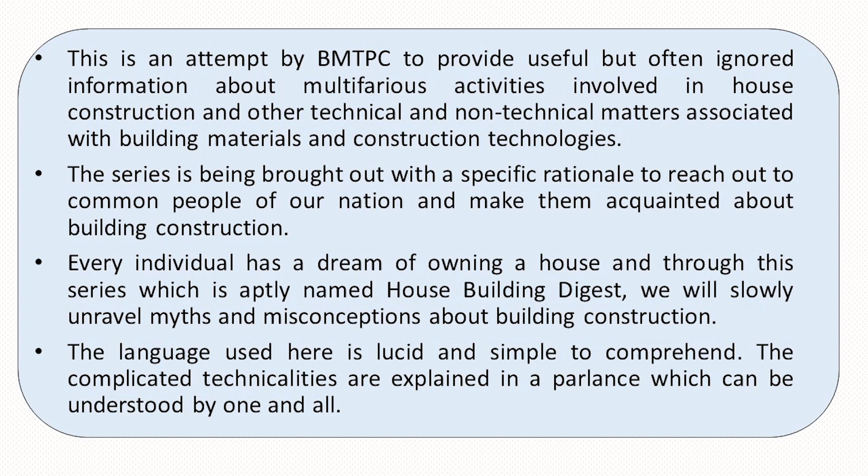Through this digest series, BMTPC is making an attempt to provide useful information about various essential activities involved in house construction, including technical and non-technical matters associated with building materials and construction technologies. Every individual has a dream of owning a house, and through this digest series, we will slowly unravel myths and misconceptions about building construction.

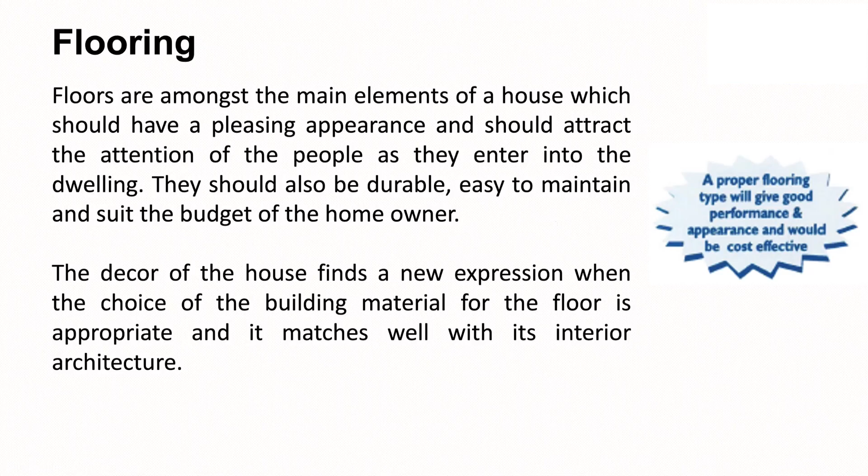The language used here is simple so that it is understood by one and all. Having discussed main building elements including doors and windows, now let us move to floors. Flooring, being a main element of the house, must have pleasing appearance and should attract the attention of people as they enter your house. Also remember, flooring should be durable, easy to maintain, and suit the budget of the owner. Normally, choosing a floor of appropriate material and appearance matching the interior architecture of the house gives aesthetic and new expression to the house. In this digest, we will discuss different types of flooring to choose from.

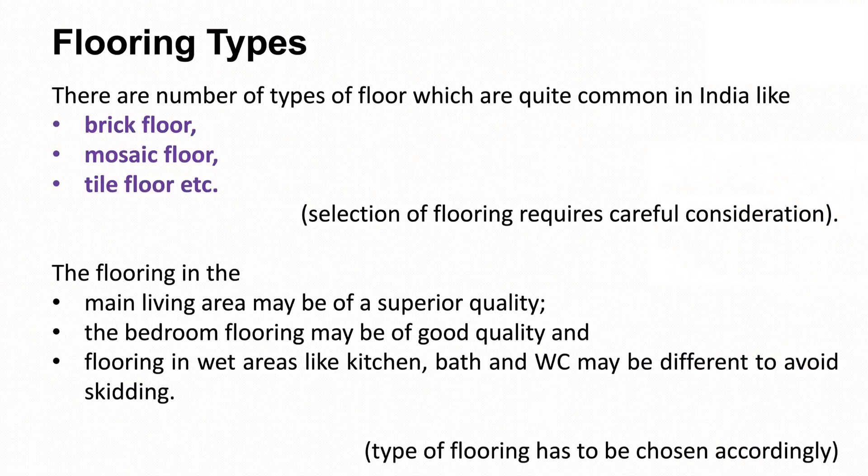There are different types of flooring: brick floors, mosaic floors, tile floors, wooden floors, cement floors. There are umpteen number of flooring options available nowadays. Therefore, the selection requires careful consideration, and different types of flooring are to be provided based on the use the floor is being put to. For example, living area may have superior quality floor, bedroom may be of good quality, and wet areas may have floors avoiding skidding, and therefore the type of flooring has to be chosen accordingly.

Similarly, let's talk about climatic conditions. The flooring to be chosen depends upon the climatic conditions. For example, in extreme hot or cold conditions, marble or stone flooring needs to be avoided as it may make walking difficult. Similarly, slippery floors are to be avoided in exterior locations such as balcony, terrace, or wet areas. It is pertinent to mention here that flooring for non-residential areas like institution buildings, airports, factories are provided in different manners as they are subjected to heavy use.

Please remember, flooring to be adopted for the house therefore depends not only on use of building and climatic condition, but also on local availability of material and flooring. Also, overall cost needs to be kept in mind while choosing flooring.

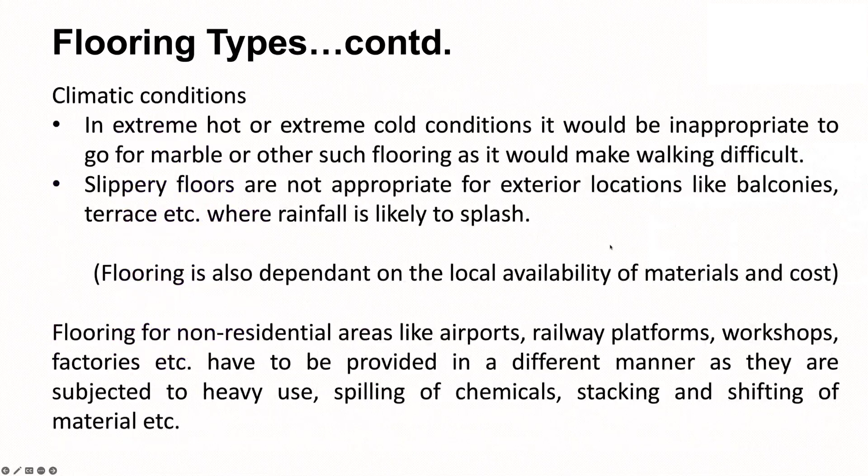Now let's discuss different types of flooring. As you can see here, the most common types of flooring used in India include mud flooring, brick flooring, stone flooring, concrete flooring, terrazzo flooring or mosaic flooring, marble flooring, tile flooring, wooden flooring, bamboo flooring, linoleum flooring. All these kinds of floorings have different performance characteristics and will be explained to you in subsequent slides. It is always advisable to have a look at the flooring being used in the area and also discuss with your architect before choosing the flooring for your house.

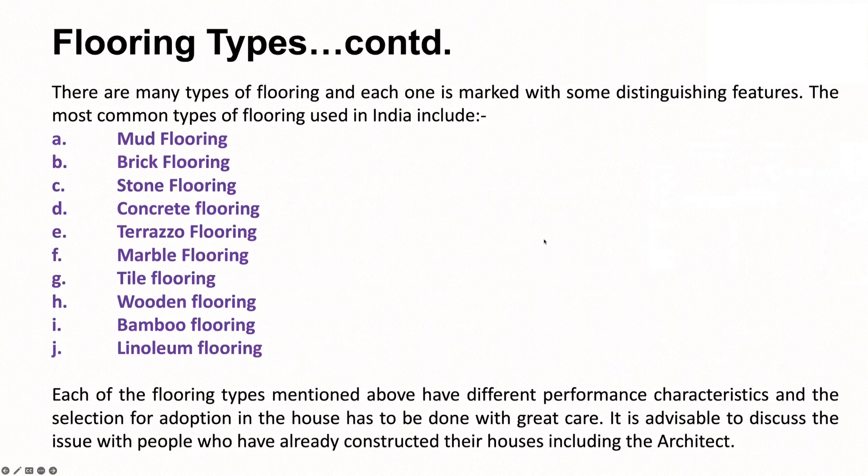Let's see mud flooring. Mud flooring is quite popular in village housing as it is readily available and its construction is very simple. First, good quality and clean mud is selected and mixed with chopped straws or bhusa along with water to get a consistent paste. This paste is applied on the already prepared bed of floor and rammed properly to get an even and level surface of about 6 inches.

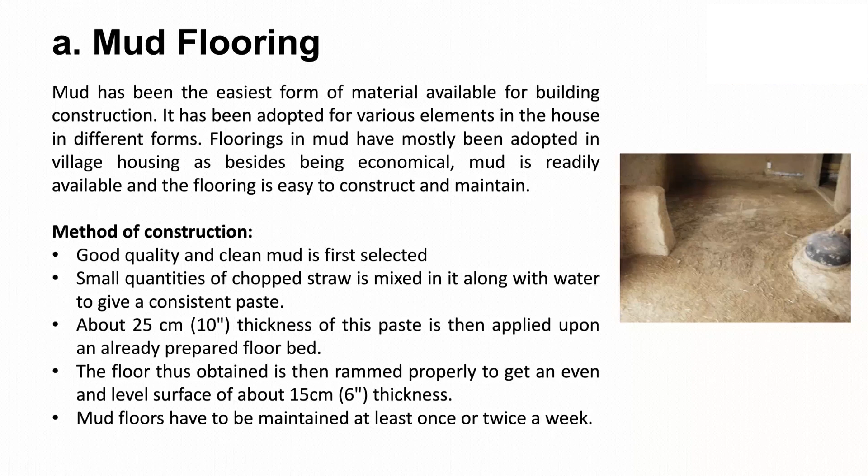Your mud floor is now ready. These kinds of floors need to be maintained once or twice a week.

Now let's see brick flooring. Brick flooring is of two types: bricks on edge and bricks laid flat. Bricks have been the mainstay of building construction in India since the time of Mohenjo-daro and Harappa. It has been successfully used for foundations, walls, roofs, etc. Brick flooring is advantageous in areas where bricks are available locally.

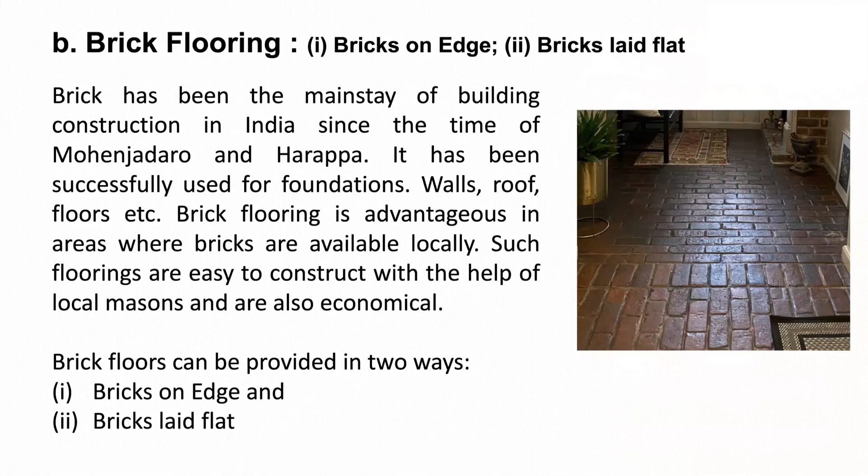Such floorings are easy to construct with the help of local masons and are also economical. Brick floors can be provided in two ways: bricks on edge and bricks laid flat. Bricks on edge flooring is most suited for ground floor in a house for interior locations. They can usually be provided as exposed flooring, or having a plaster coat on the same. Plastered floors in bricks are better suited for exterior locations like verandas, courtyards, etc., or wet locations like kitchen, WC, etc.

To construct this type of flooring, the filled up earth under the flooring is compacted well, followed by laying about 10 to 15 centimeters, or 4 to 6 inches, of cement concrete in proper slope for draining out water. Bricks required for flooring are to be adequately soaked in water for at least 6 hours before use so as to keep them wet. Then a 12 mm mortar is laid on the already prepared concrete base.

On this mortar bed, bricks are laid on edge and jointed with mortar. Bricks can be laid in a pattern if the flooring is to remain exposed. In such a case, the joints should be rendered flush and finished to get an even surface. The surface so obtained should be kept moist for a period of at least 7 days.

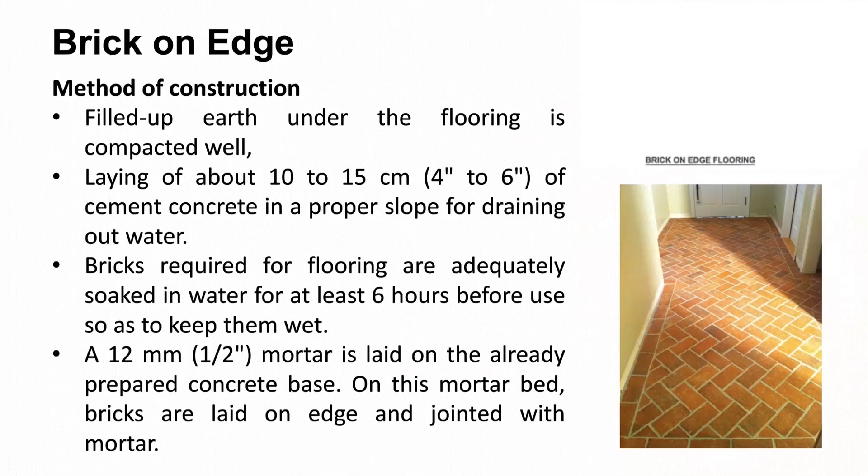If the brick on edge flooring is to be plastered, the joints in brickwork should be raked properly by about 15 mm during the process of laying of floor, and plastering should be done over it. Plastered brick floors perform better than non-plastered surfaces, although plastering adds to the cost of providing the flooring.

Now let's discuss bricks laid flat. This kind of flooring is prepared in a similar manner to brick on edge flooring. In this case, the brick floor thickness is kept at 7.5 centimeter or 3 inches, as against 11.5 centimeter or 4.5 inch in case of brick on edge flooring. The number of bricks used is less than in brick on edge flooring, as also the quantity of mortar. Such flooring is most suited for upper floors, as weight coming on the walls and foundation is comparatively less on upper floors.

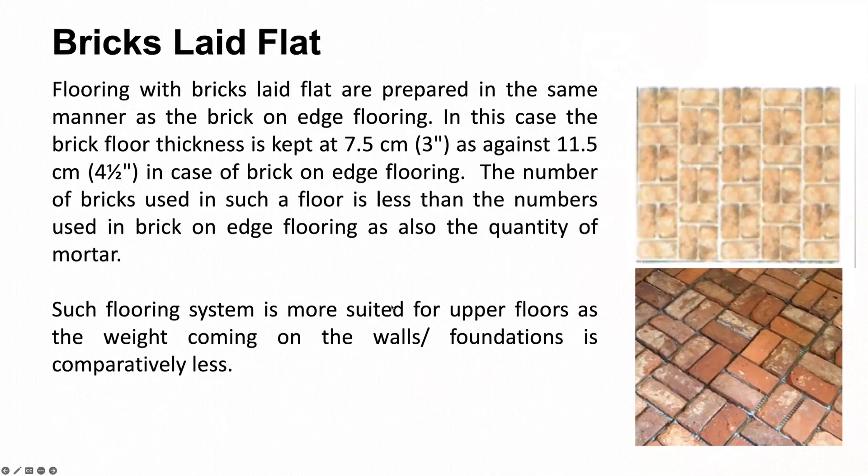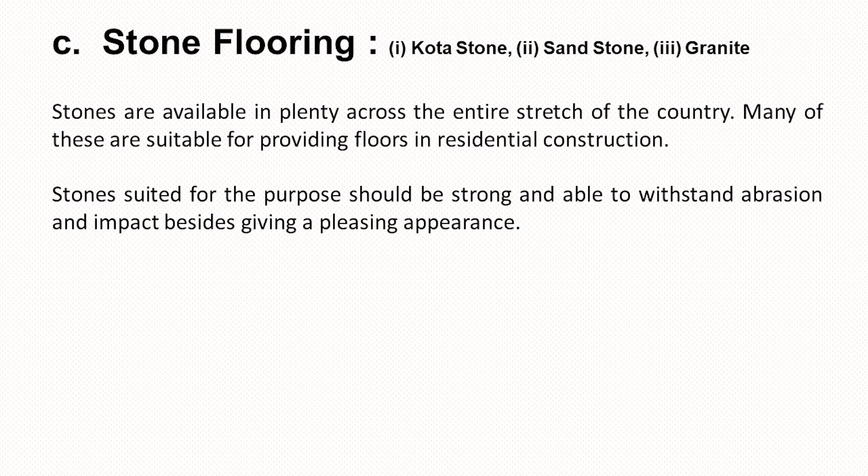Let's now see stone flooring. Stones are available in plenty across the entire stretch of the country. Many of these are suitable for providing floors in residential construction, such as Kota stone, sandstone, and granite. Stones suited for the purpose should be strong and able to withstand abrasion and impact, besides giving a pleasing appearance. Let's discuss them one by one.

Kota stone is a quarried stone which is cut into different sizes for providing flooring in residential areas, including on steps, risers and landings. The stone used should be of good quality, free from cracks and other such flaws. The thickness may vary from 2 centimeter to 4 centimeter depending upon the location it is being used. The top surface of the Kota stone is polished before being brought to the site.

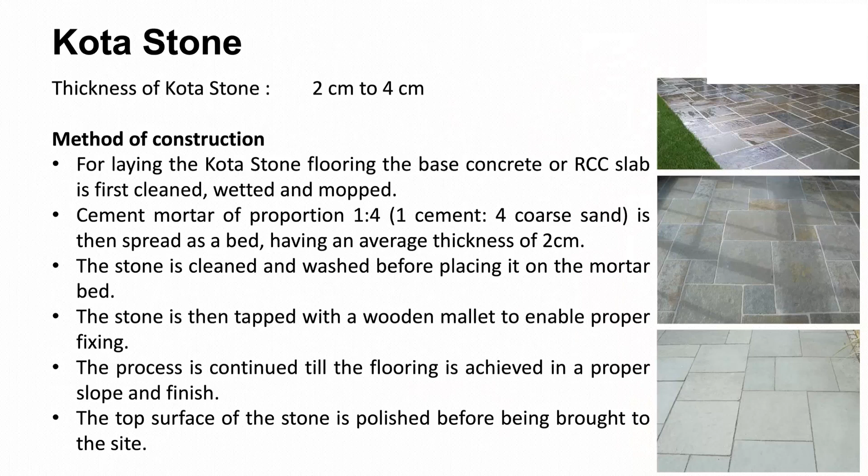For laying the Kota stone flooring, the following method is adopted. First, the base concrete or RCC slab is cleaned, wetted and mopped. Then cement mortar of proportion 1:4, that is 1 cement to 4 coarse sand, is spread as a bed having an average thickness of 2 centimeter. The stone is then cleaned, washed, and placed on the mortar bed, then tapped with a wooden mallet to enable proper fixing. The process is continued till the flooring is achieved in a proper slope and finish.

Now let's discuss sandstone. Sandstone has different physical and chemical properties compared with Kota stone. It is usually available in white or red color. Each stone is cut into the required size and shape for application as flooring. The finished thickness before application is usually 4 centimeter or 40 mm.

As in case of Kota stone flooring, the base concrete or RCC slab is cleaned, wetted and mopped. In this case, a bedding mortar of proportion 1:5, where 1 is cement and 5 is coarse sand, is first laid. The sandstone is then laid over it to the required level and slope.

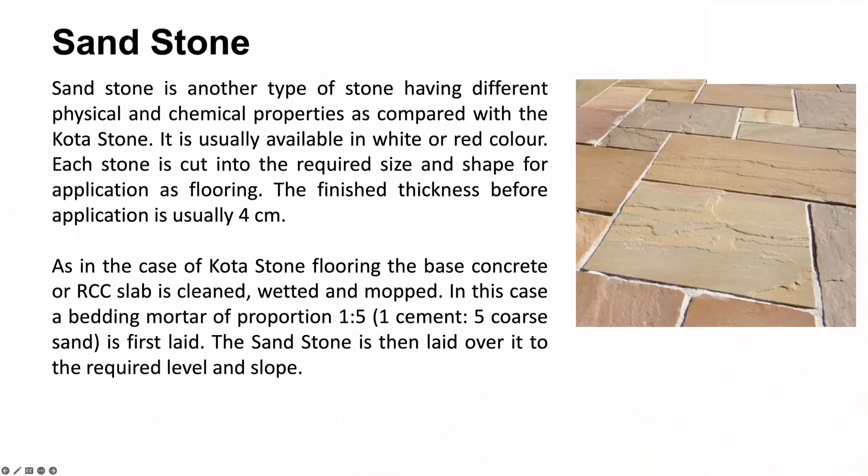Let's now move to another kind of stone flooring, that is granite floor. Granite is a natural stone immensely used in house construction, including for floors. It is available in various forms like tiles and blocks. Its fabrication and polishing is a well-defined process which needs to be executed only by well-trained and experienced hands. The natural shine of granite may last forever if treated with care. Flooring with granite is amongst the costliest, although it gives an elegant and pleasing look. The laying procedure for granite stone flooring is similar to that of Kota stone or sandstone.

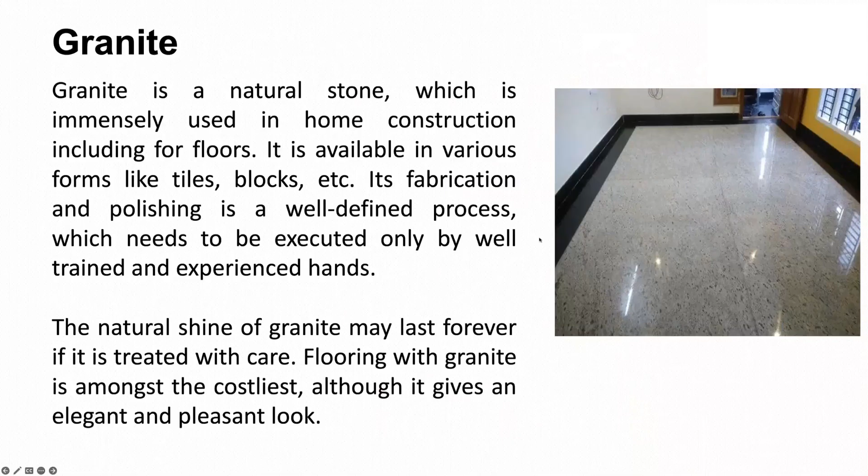Next is cement concrete flooring, also known as IPS flooring. This is one of the most common types of flooring provided in houses. This type of flooring is quite durable and easy to construct and maintain, besides being economical compared to tile, marble or other such types of flooring. In most government houses, this kind of flooring used to be preferred.

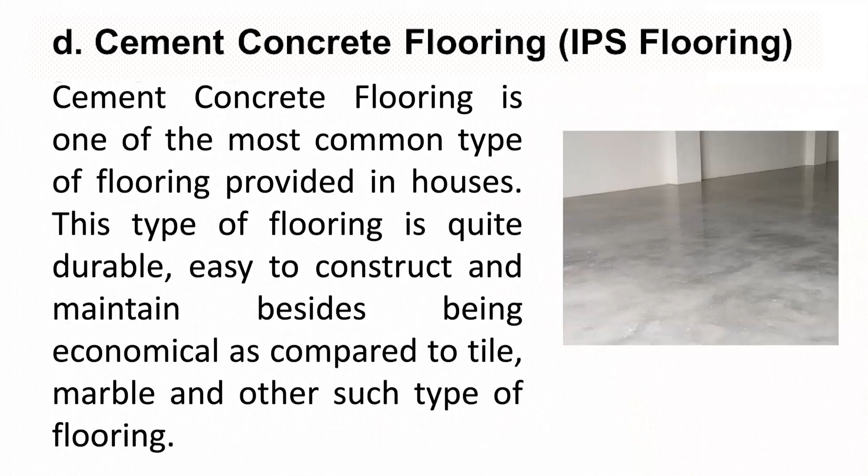When such flooring is to be used for the ground floor, the following procedure is adopted. First, the earth in the plinth is properly consolidated. Then a layer of clean coarse sand about 10 to 15 centimeter thick is uniformly spread over the earth filling. During its consolidation, care has to be taken that a proper slope as required for the floor is provided. The base concrete, either in cement or lime, should then be laid about 7.5 to 10 centimeter thick over the coarse sand in the required slope, and tamped properly.

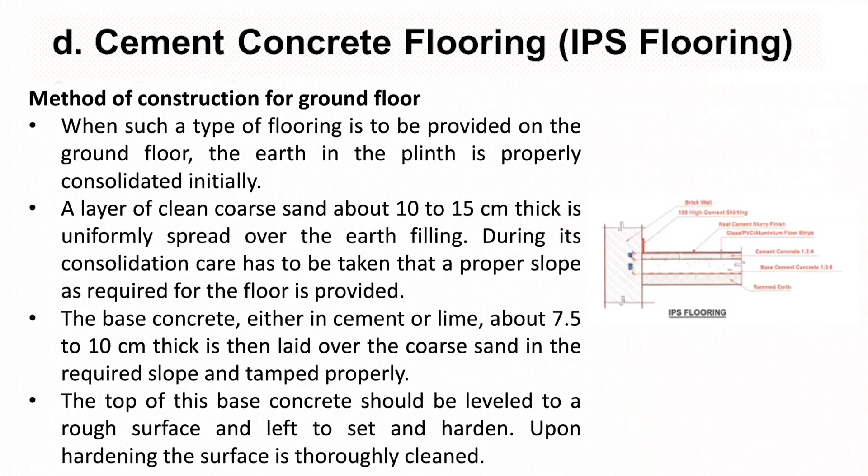The top of this base concrete should be leveled to a rough surface and left to set and harden. Upon hardening, the surface is properly cleaned. The top of the floor is then divided into panels, rectangular or square in shape, using glass or other strips. The area of each panel should preferably be less than 2 square meters.

Once the paneling has been done, the top of the base concrete is made damp and cement slurry is applied on it. This slurry creates a proper bond between the base concrete and the topping. Normally, cement concrete of proportion 1:2:4, where 1 is cement, 2 is sand and 4 is coarse aggregate, of required thickness, say about 4 centimeter, is provided as the topping concrete.

The top surface is thoroughly tamped and floated with wooden floats to obtain a smooth surface. The surface so obtained is cured for about 10 days before putting it to use.

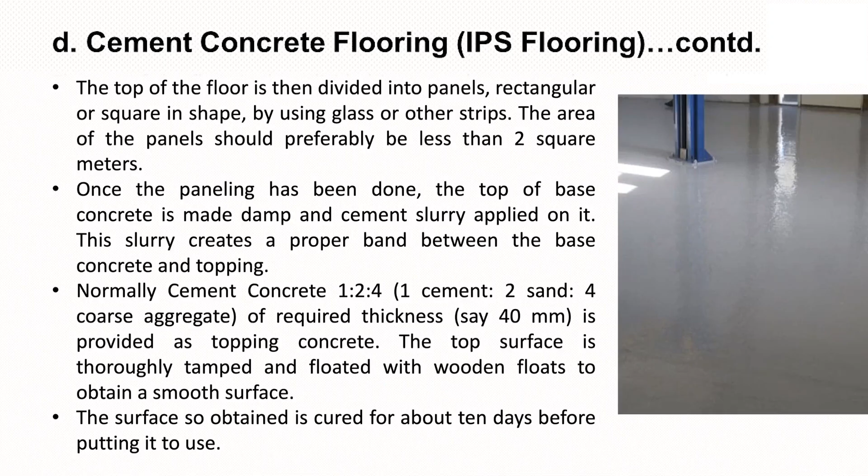Now let's see cement concrete flooring for upper floors. When this kind of flooring is to be provided on upper floors, the top concrete is laid directly over the RCC slab. At times, a cushioning layer of lime mortar is also applied over the RCC slab before laying the top concrete.

Cement concrete flooring can be finished with a plastering layer of 10 mm thick red oxide of iron. This would give a red color look to the surface. Different designs can be made by making panels in the floor and filling them with plasters of required color.

Lately, there has been a practice of polishing cement concrete floors to give a shining finish. Polished concrete is a high gloss finish attained by using special floor polishers to grind down surfaces to the desired degree of shine and smoothness. The resulting surface requires less maintenance and can be stained to replicate the look of polished stone. Polishing of concrete floors adds to its cost.

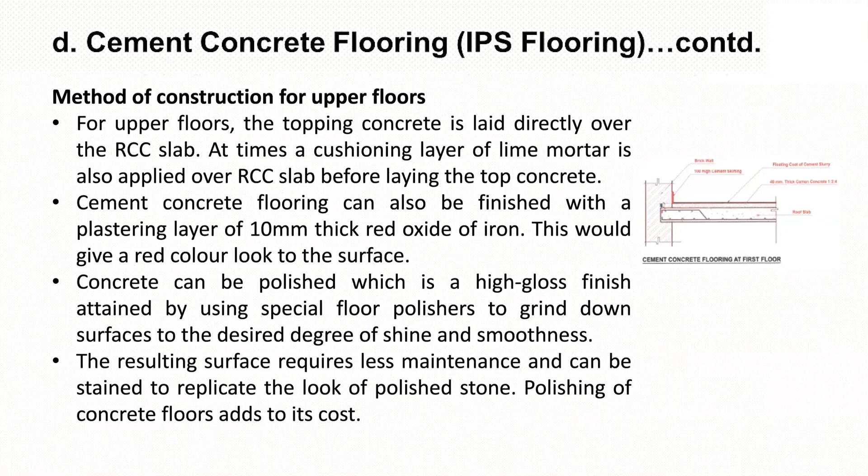Now let's move to another category, which is mosaic flooring or terrazzo flooring. This is another type of flooring commonly used in India. As this type of flooring gives a pleasing look, it has been extensively used for living rooms, bedrooms, etc.

This type of flooring is provided in the same manner as cement concrete flooring, except that the top layer consists of terrazzo, which is a mixture of marble chips and white or colored cement in the ratio of 3:1. For a 40 thick terrazzo floor, an upper layer of concrete 34 thick is first provided over the base concrete, finished with a topping of terrazzo 6 thick.

Paneling, etc. can also be done as in the case of cement concrete flooring. The surface obtained after application of terrazzo floor is damped and rolled and left to dry for about a day or so. After this, the surface is cured for about 2 to 3 days with standing water.

The grinding of the surface is then done 2 to 3 times, either by hand or by grinding machine using carborundum stones. In case the chips become loose or come out of the surface, repairing has to be done with cement grout. The floor is finally polished either manually or with the help of machines.

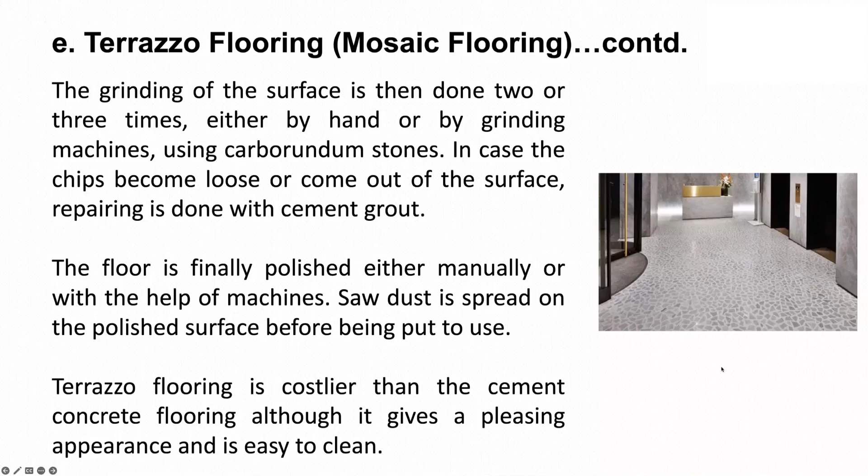Let's see now marble flooring. Marble flooring has traditionally been provided in religious places, palaces, havelis, etc., as it enhances the look of the structure. Lately, such flooring has been used extensively in residential buildings also.

The method of construction is as follows. Marble flooring is laid on the prepared subgrade or RCC slab. Upon cleaning the subgrade, a 20 thick mortar in cement and coarse sand in the ratio of 1:4 is first applied. Each marble slab is then placed and pressed on the bed mortar. The marble slab is then lifted and mortar filled up in the hollow portions.

Upon slight hardening of the bed mortar, cement slurry is applied on the surface. The marble slab is then laid back and cement slurry is applied on the sides of the marble slab. The process is continued to obtain the floor of required finish and slope. The surface so obtained is cured for a period of about 10 days, and if need be, polishing can be carried out on the top surface.

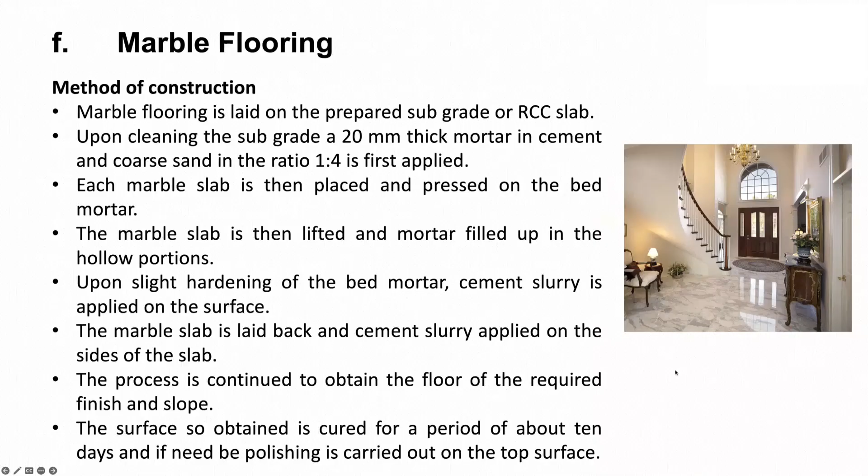Now let's see tile flooring. Flooring tiles in India have been there over the years, and they have gained popularity over cement and concrete floors. Flooring tiles are available in different patterns, designs, and utility options. Usually they are costlier than cement concrete flooring, and their cost depends upon the type of tiles being used.

Various types of flooring tiles in India include terrazzo tiles, checkered tiles, glazed tiles, vitrified tiles, PVC tiles, etc. A wide variety of tiles are currently available in the market, and homeowners have to make a choice depending upon the finishing to be provided in the house, its location, local availability, as well as the budget for putting up the floor. Various types of tiles will be discussed in subsequent slides.

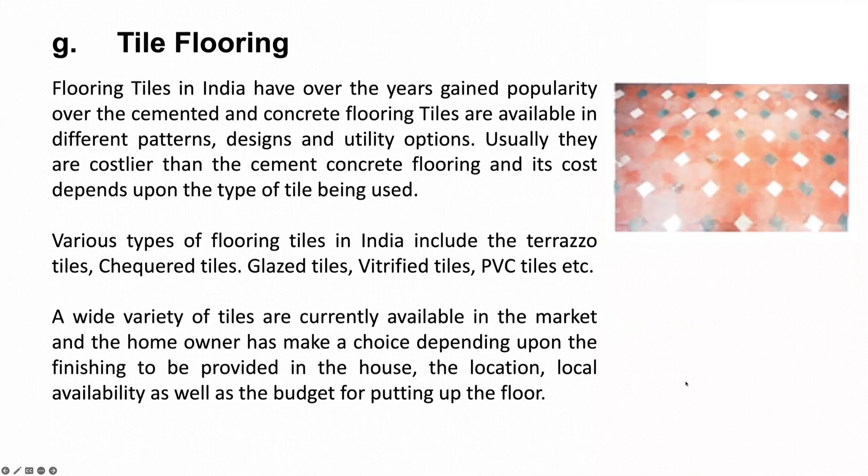First, let's see terrazzo tiles. These are available in the market with sizes varying from 20 centimeter by 20 centimeter to 30 centimeter by 30 centimeter, and their thickness varies from 2 centimeter to 3 centimeter.

Such tiles can be used in living rooms, bedrooms, as also in the risers and treads of your staircase. The tiles are laid on a base concrete or base slab, RCC slab, usually by providing a cement sand mortar of average 3 centimeter thickness. Before putting the tiles on the mortar bed, they should be thoroughly cleaned and ultimately laid in the desired slope.

Tiling should be done with care such that they are laid in a straight line. The floor should be kept wet for about 7 days and finally ground and polished as in case of terrazzo flooring. It is advisable to keep some extra tiles in the house which may be required as and when some of them require replacement.

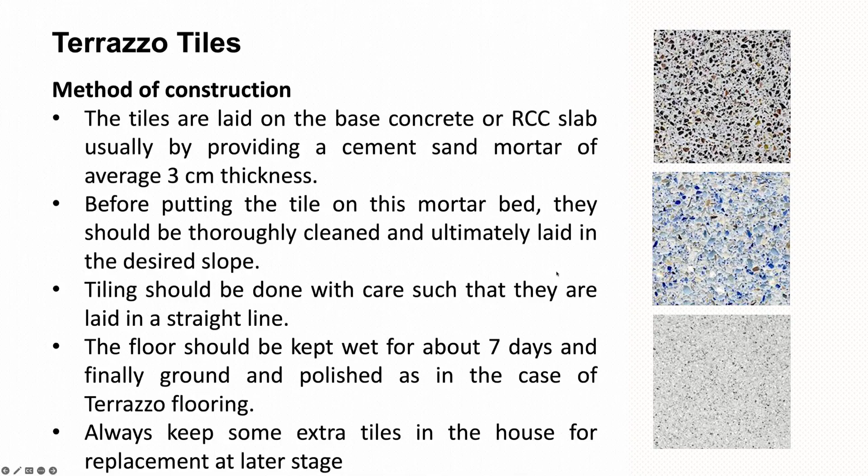Let's see another kind of tile, which is checkered tiles. These are similar to terrazzo tiles except that they have grooves of about 2.5 centimeter in both directions. The method of laying such tiles is similar to that of other tiles. Care has to be taken to finish the grooves in proper manner.

Checker tiles can also be provided on the walls to give it a different look. Usually they are costlier than plain terrazzo tiles.

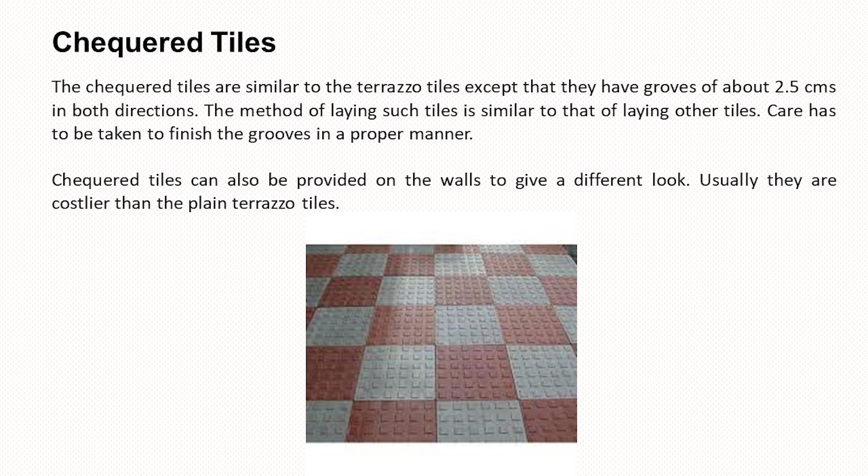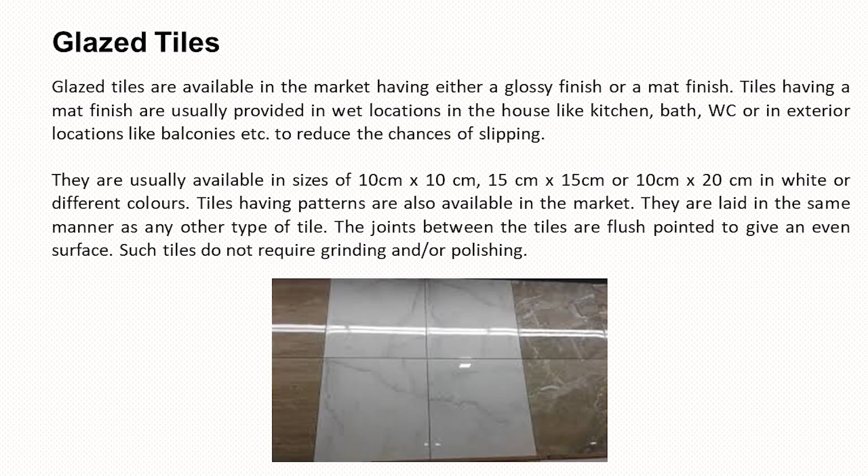These tiles have patterns. They are laid in a similar manner as any of the other types of tiles. The joints between the tiles are flush pointed to give an even surface. Such tiles do not require grinding or polishing.

Next kind of tiles are vitrified tiles. They are increasingly being adopted nowadays for construction of floors in residential buildings. They are quite sturdy and can be provided with equal ease both on new surface or on an existing flooring. Although they give a good look and can be cleaned easily, they are quite costly as compared to other tile floorings explained to you.

Vitrified tiles are available in glossy or matte finish, having different designs and patterns. Sizes up to 60 centimeter by 60 centimeter are also available nowadays in the market, and accordingly each tile covers a large area. The flooring is provided in a similar manner as that of other types of tiles. However, care has to be taken to match the patterns while laying the same.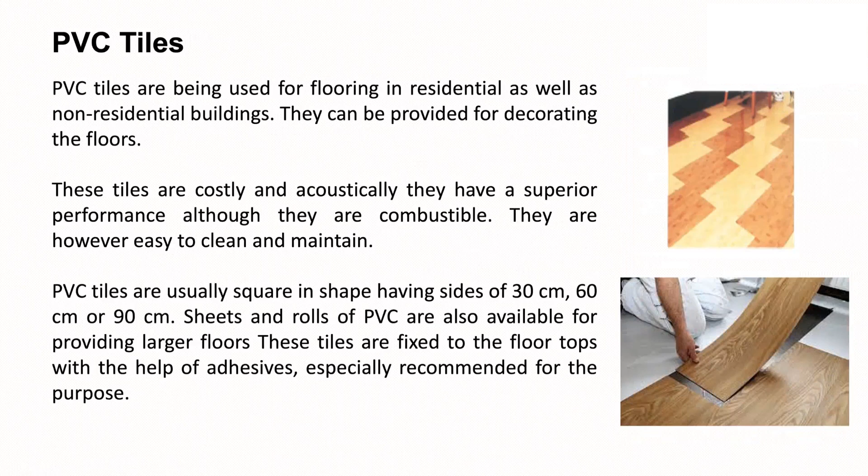Wooden flooring is most commonly used in hilly regions of the country where temperatures are quite low. At present, they are being provided in floors of high-end housing to give it a good appearance. To provide such a type of flooring, a cement concrete layer of about 15 centimeter thickness is usually provided as a base with a view to prevent ingress of moisture later.

Timber joists are then placed over the surface and properly secured in order that there is no movement. Once the base layer has been laid, the top layer can be laid in timber planks, boards, etc. in the desired pattern. The top surface is then polished. Wooden floors are usually costlier and require regular maintenance.

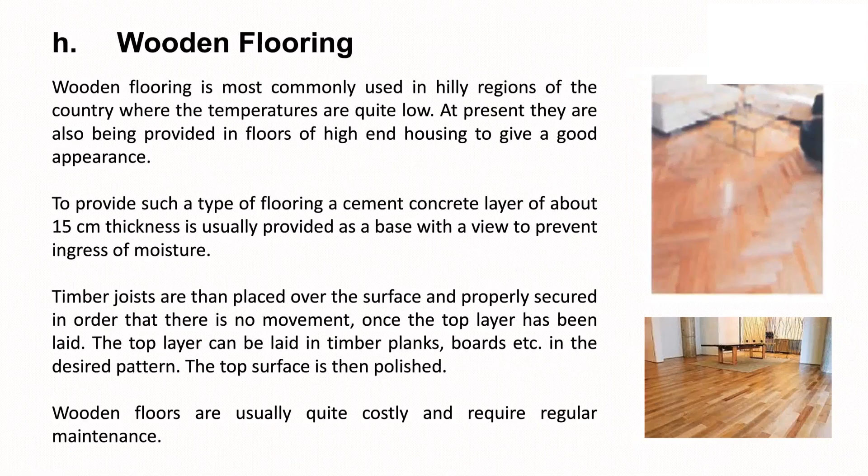Next is bamboo flooring, which is also very common now in areas where bamboo is available locally. However, such floorings have recently become quite popular due to its aesthetics being uniquely attractive, strong and resilient, dimensionally stable, moisture and stain resistant, and being environment friendly.

It is also said to have better properties than hardwood. Another outstanding property of bamboo is its dimensional stability and moisture resistance. Accordingly, it is suitable for use in areas like bathrooms and kitchens where hardwood flooring is usually not recommended. It is also less expensive than many hardwoods and readily available for nailing down or glue down installations.

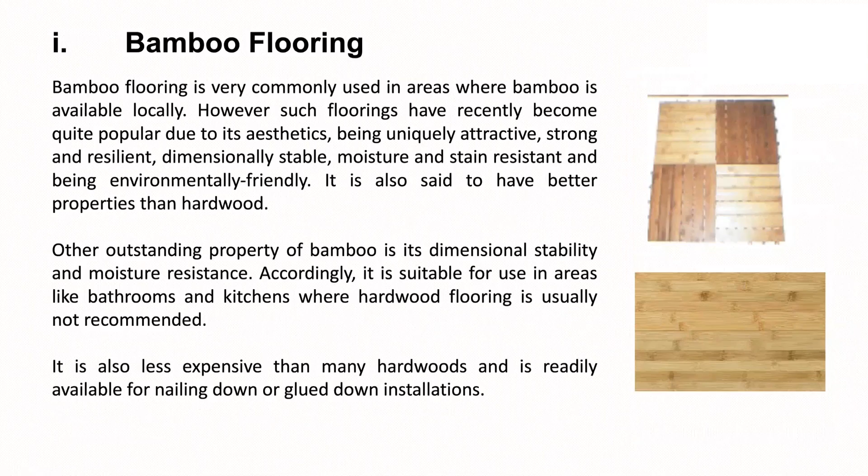Let's move to the next category, which is linoleum flooring. This kind of flooring is usually provided on a floor base which is already smooth and plain. It is suitable for interior locations in the building. Linoleum is a combustible material and should not be used in areas prone to fire. It should also not be used in areas which are likely to become damp over a period of time.

For residential areas, the thickness of linoleum usually recommended is 3.2 mm.

Linoleum is available in rolls and should be first cut to sizes slightly more than the floor size. It should then be left for 2 to 3 days to allow it to shrink. It is then cut to the actual size and stuck to the finished clean and dry floor surface with the help of adhesive. For a longer life, linoleum flooring should be kept dry when in use.

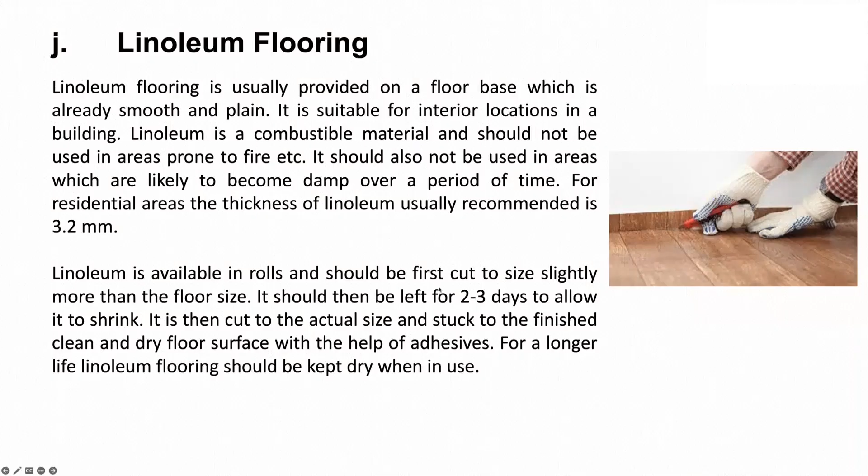Having finished different kinds of flooring, now let's see another important aspect of flooring, which is skirting or dado. This is the process of covering the lowest part of interior wall and is part of your flooring. It is usually provided after completion of flooring in the house. Its prime purpose is to cover the joint between the wall surface and the floor.

Skirting protects the wall from abrasion and knocking and reduces the chances of floors getting damaged at its edges and corners. It also provides a decorative finish to the floor walls besides covering the blemishes, if any, in the floor or edges at the junctions and corners.

Skirting is usually provided up to 10 to 15 centimeters above the floor level and mostly of the same material and specification of the flooring itself. If provided in cement, concrete or terrazzo, the thickness is kept around 12 mm. From consideration of aesthetics, the color of skirting may be different from that of flooring.

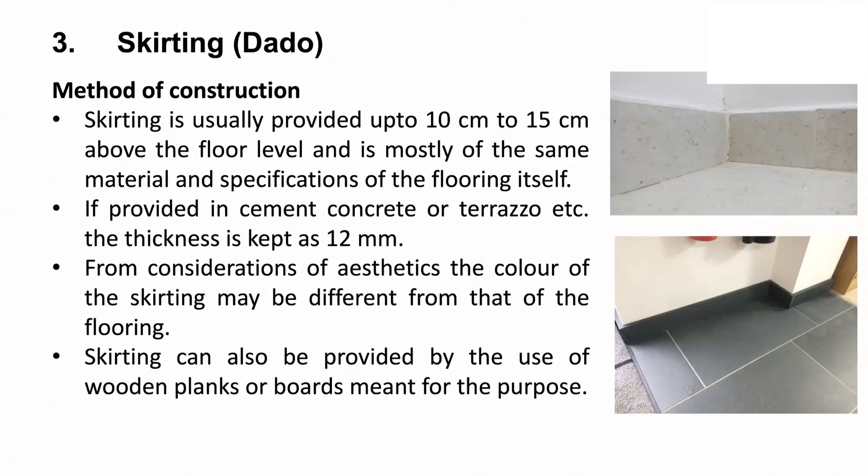Skirting can also be provided by use of wooden planks or boards meant for the purpose. Presently, a large number of designer skirtings are available in the market, which provide a good decorative finish. These tiles can be stuck to the wall with the help of a mortar.

Bigger size of tiles and marble stone can be cut to the required sizes to provide the skirting or dado. Care should be taken that the skirting is of uniform thickness and height is provided. In case of wet areas like WC bath, large heights of walls require protection and accordingly the skirting has to be done differently, and it is termed as dado.

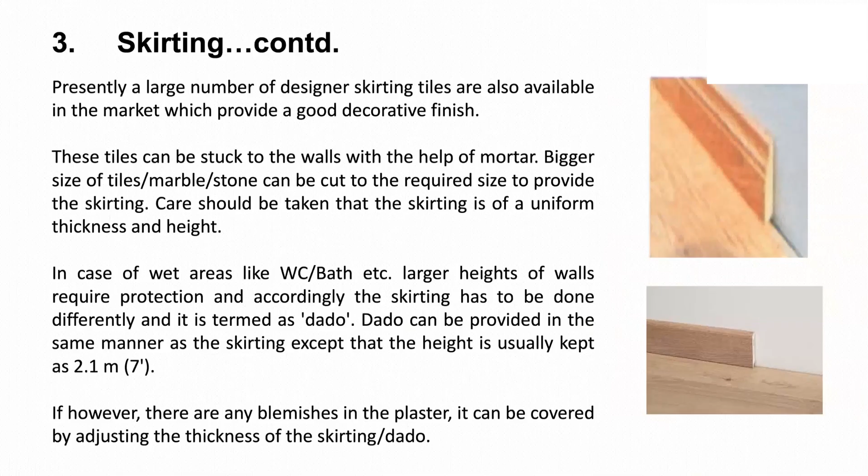Dado can be provided in the similar manner as that of skirting, except the height is usually kept around 2.1 meter or 7 feet. If, however, there are any blemishes in the plaster, it can be covered by adjusting the thickness of skirting and dado.

Having constructed the floor, the next most important thing is to maintain these floors properly in order to retain the original look for a longer time and prevent damages. Simple do-it-yourself flooring maintenance is important for keeping the floor looking good. So is calling a professional once in a while for giving advice on maintenance.

Brick flooring usually requires maintenance of the joints. The damaged joint should be raked properly and filled with mortar as and when required. Similarly, broken bricks, if any, should be replaced immediately, or other bricks of flooring may become loose, thereby damaging the floor. Similarly, the damaged portion of concrete flooring would require immediate repairs, thereby preventing further damages to the floor.

Marble flooring, on one hand, is hard, durable, lasting for years, whereas on the other, polished surface can be damaged by chemicals, stains, and abrasion. Such floors should therefore be used and maintained properly.

Timber floors also require good maintenance. Moving or dragging furniture on timber floors may cause damage. Accordingly, protective pads should be fitted beneath furniture legs to prevent scratches. Such floors should be cleaned using as little water to help keep floors clean. Place doormats outside and preferably inside each external door to trap dirt.

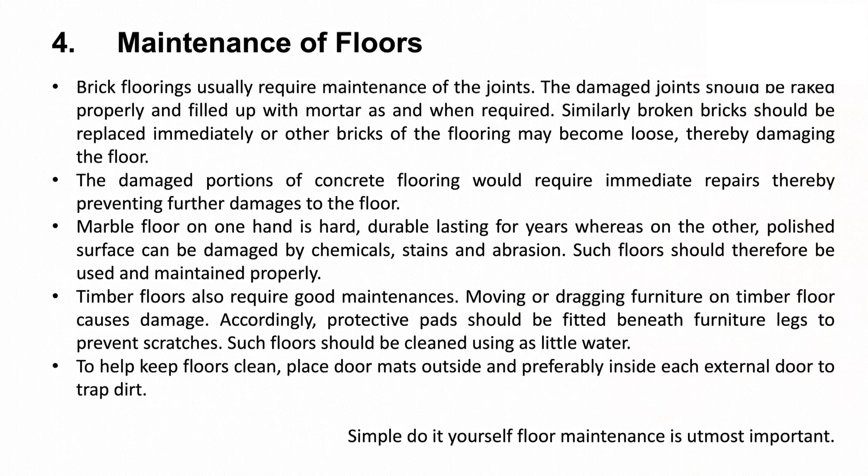Simple do-it-yourself floor maintenance is of utmost importance.

Flooring can be provided, as explained in this slide, in a number of ways. The choice of flooring is dependent on local availability of the material, climatic condition, and skill of the manpower available. It also depends on choice of the homeowner as well as the budget available. It is always advisable to discuss the issue with the architect before finalization of the specification.

There are a number of agencies which specialize in providing floor in a house. The house owner is advised to look into their websites, which will give a fair amount of idea of different types of flooring as well as their costs. The matter can also be discussed with persons who have had their houses constructed in the area.

Whatever be the type of flooring to be provided, some of the precautions that should be observed during the construction are: the base and sub-base of the floor at the ground floor should be prepared with great care, strictly following the construction specification procedure. The required slopes for the floor should also be given in the base course itself.

Metallic or other strips as may be required to lay the flooring should be laid in a straight line. Curing of floors, including that for base concrete, should be carried out properly such that the required strength is obtained. Tiles for flooring should be laid on mortar bed in a manner that no gap is left between the floor and tile at any place.

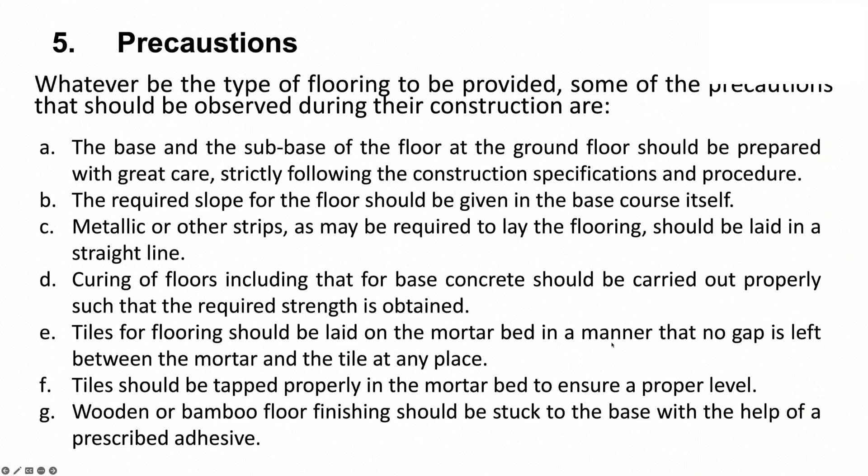Tiles should be tapped properly in the mortar bed to ensure proper level. Wooden or bamboo floor finishing should be stuck to the base with the help of prescribed adhesive. If these precautions are taken, the floors will perform well and would require less maintenance over the period of time.